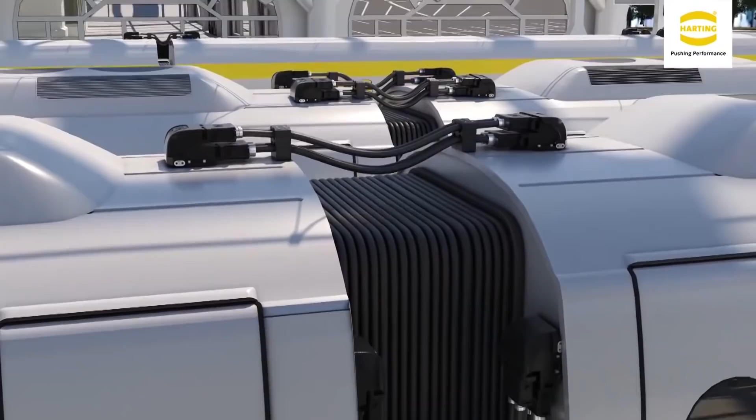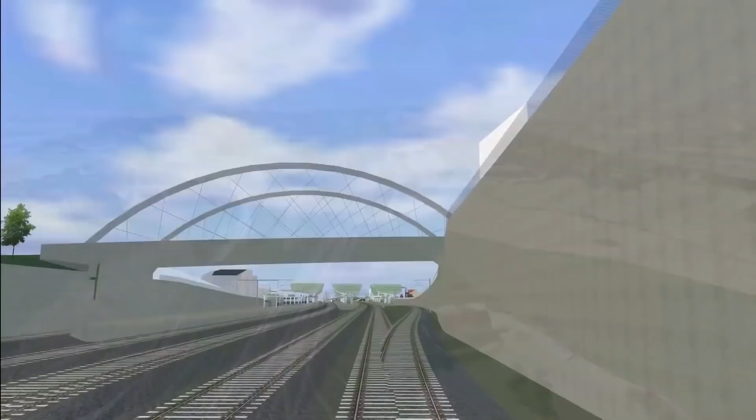Welcome back to Railways Explained. Today we are talking about one Norwegian mega railway project which is currently in the implementation phase, the Follo Line project. The Follo Line is at the moment the largest transport project in Norway and one of the most important high-speed railway projects in the world. The main reason supporting this claim is the great technical complexity linked to this project, and you will soon find out why.

The Follo Line project includes the construction of a 22 km long double-track high-speed rail line between Oslo Central Station and the new station in the town of Ski, for a speed of 250 km per hour. The line will have the possibility to accommodate both passenger and freight transport.

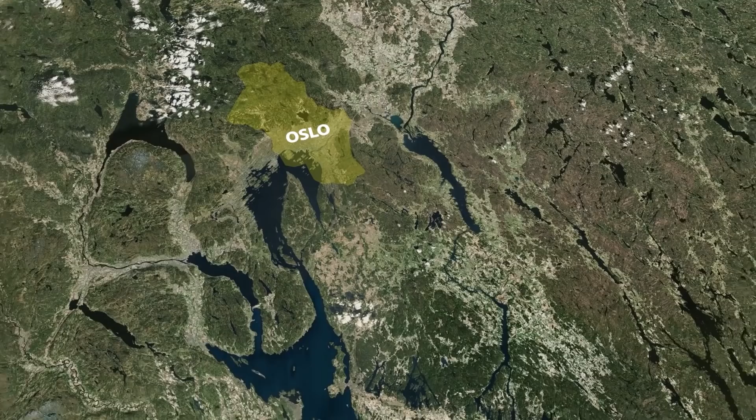It is a continuation of the Norwegian National Rail Administration's intercity plan to build 4-track lines along the three main corridors out of Oslo. The first was the Gardermoen line, completed in 1998, and the second was the Asker line, completed in 2011. Currently, between Oslo and Ski, there is a line known as the Østfold line, which was upgraded to double track and higher speeds between 1989 and 1996.

As the Østfold line has reached its capacity and population growth of at least 30% is anticipated in the region by 2025, the construction of a new connection with a new hub in the city of Ski is imposed as a logical solution. Now we come to the point.

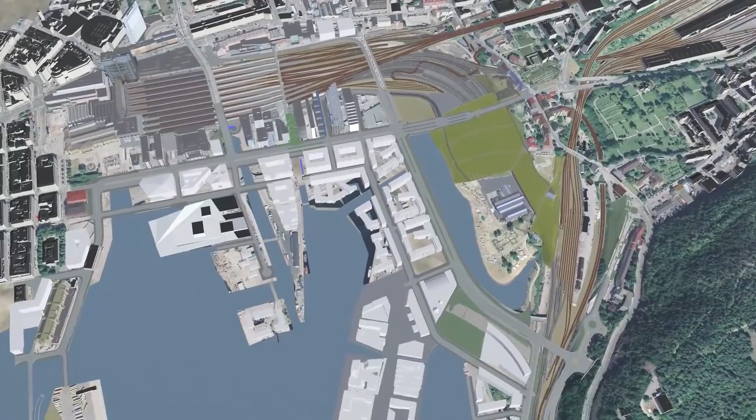Constructing new rail tracks in such a dense metropolitan area as it is the case here is a huge logistics challenge. Furthermore, one of the constraints of the project was to cause the least amount of disruption possible and to end much of the work without interfering with the daily traffic flows.

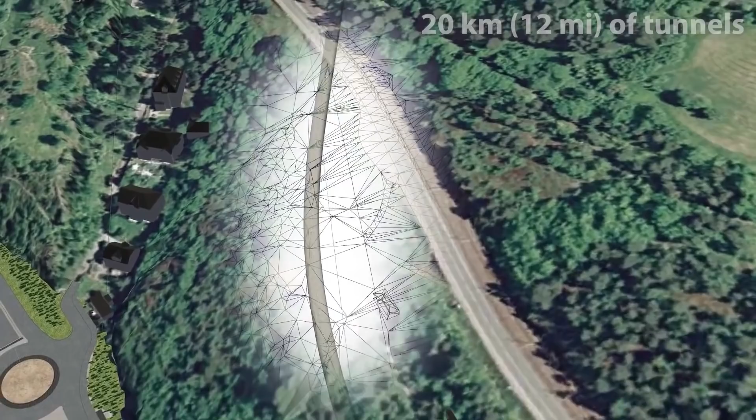You also might be wondering what kind of mega project it is that includes the construction of only 22 kilometers of rail tracks. Well, these 22 kilometers cost as much as $2.35 billion. The reason? Well, they include the construction of 20 kilometers of tunnels. But not ordinary tunnels. These tunnels will pass under the existing busy road tunnels. We got you, right? Okay, we'll come back to that later.

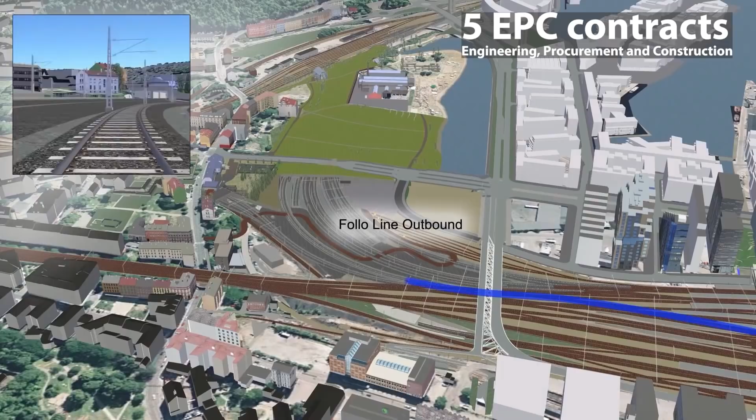The Follo Line project is divided into three sub-projects: Oslo Central Station, tunnel construction, and the surface section and new Ski station. The contract strategy for the Follo Line project has been formulated based on its size. The project has 5 EPC contracts for general contractors and 1 single contract as a frame agreement. It is split into the following main contracts: Civil Oslo S, approach and connection to Oslo Central Station; EPC Railway Systems Oslo S, connection of railway systems to Oslo Central Station; EPC Tunnel TBM, the Tunnel TBM section; EPC Ski, surface section and the new Ski station; and frame agreement for the signaling system.

Now, let's dwell in more detail on the construction of tunnels.

The tunnel concept consists of the construction of a twin-tube tunnel named the Blix Tunnel, which will be the longest railway tunnel in the country. As we said, the total length of the tunnels is 20 kilometers, but it is divided according to construction methods. 18.5 kilometers of the tunnel has been excavated in rock using tunnel boring machines, and by drill and blast and drill and split methods in the remaining parts towards Oslo Central Station.

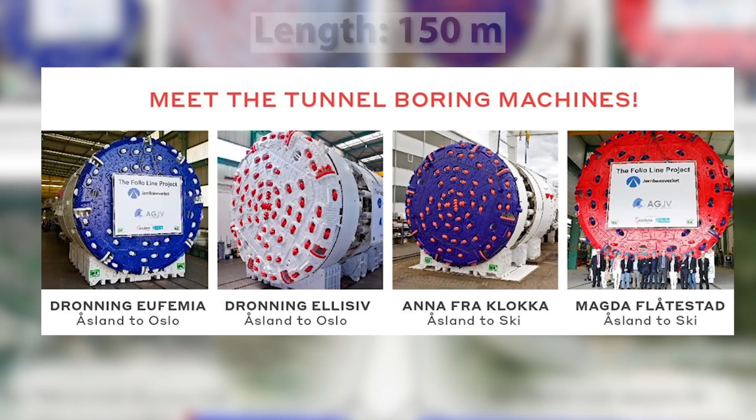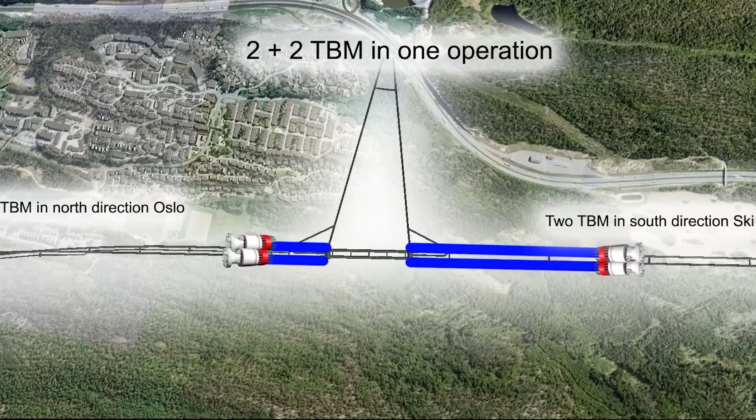The project is characterized by the fact that the double tunnel was created simultaneously with 4 TBMs, each one 150 meters long and weighing 2,400 tons. Also, an innovative solution was used for the access of TBMs. The project comprised the construction of a single-access site in the rural area of Åsland, about midway between Oslo and Ski. From there, 4 TBMs were launched, 2 in each direction, which excavated at the same time and at a close distance for long stretches.

The underground assembly tunnels, 20 meters high, 50 meters wide, and over 60 meters long, are the biggest ever made in Norway. It is definitely a record-breaking building site.

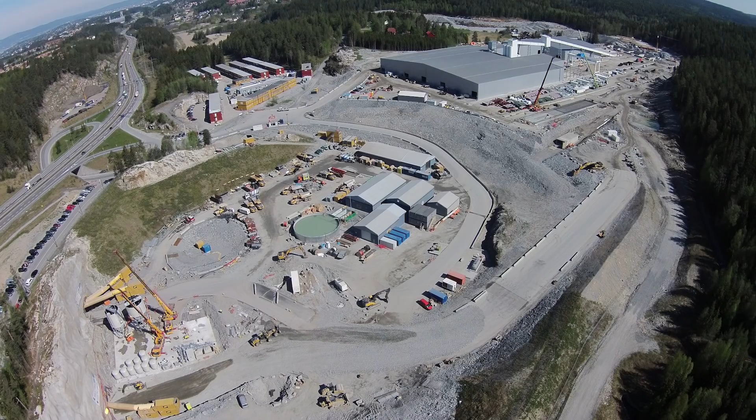In Åsland, a low-impact base camp was built, with over 500 homes for the workers, but also offices, a gym and a canteen. A factory to manufacture the segments needed for the tunnels was also built, so they can be transported while avoiding heavy traffic. The tunnel was lined with over 20,000 rings, comprising 135,000 segments.

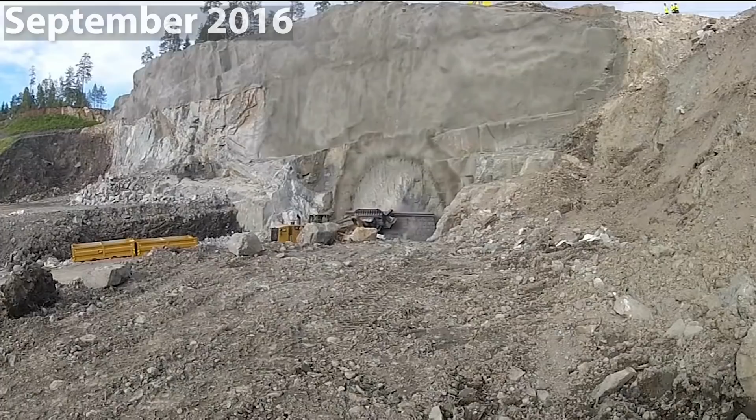The starting shot for the first machine was given in early September 2016, in the presence of the Norwegian Prime Minister Erna Solberg and the Minister of Transport Ketil Solvik-Olsen.

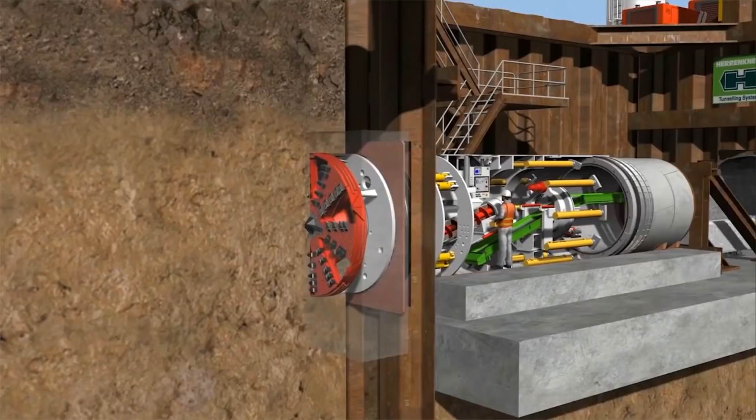On 11 September 2018, two of the four moles, Queen Eufemia and Queen Ellisiv, made the tunnel breakthrough simultaneously, ahead of schedule, while the other two TBMs, Magda and Anna, made a spectacular double breakthrough as well, in Ski on 26 February 2019. The tunnel boring machines drilled a hole of 9.96 meters in diameter, excavating about 9 million tons of rock, lining the tunnel with concrete segments, producing a smooth and watertight solution.

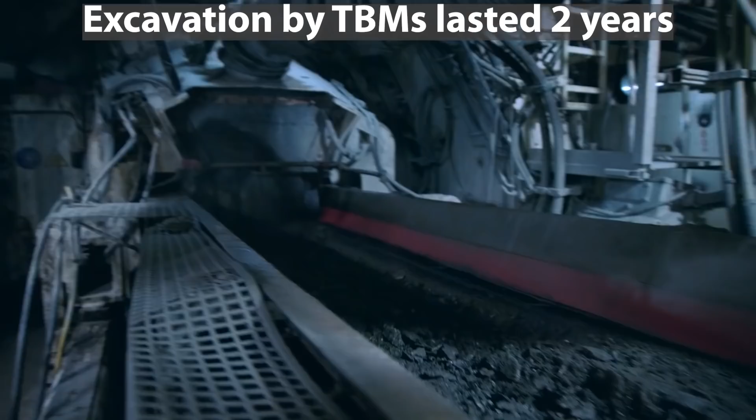Overall, the excavation of the 4 TBMs lasted about 2 years, involving over 750 workers and 100 engineers and technical staff from 25 different countries.

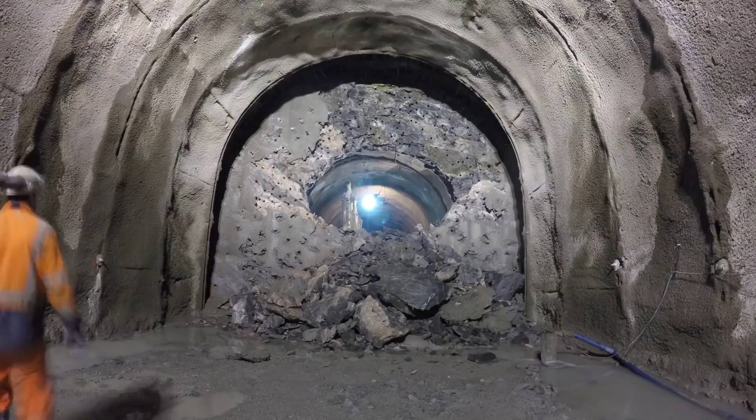The remaining 1.5 kilometers of tunnels represents the connection with Oslo Central Station. For this part, it was necessary to use the second method because the railway tunnels pass beneath the existing Ekeberg Road tunnels, one of Norway's busiest road tunnels. In addition, space is limited by various forms of infrastructure, including multiple oil caverns.

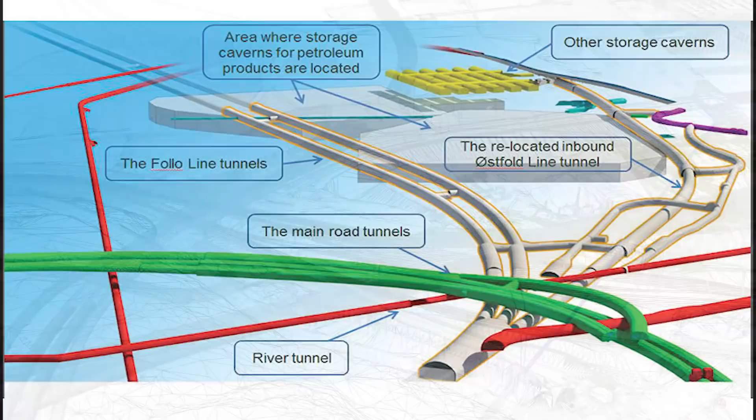Another important factor for the future urban environment is that the Alna River, which is the longest river in Oslo, will be able to pass above the railway tracks.

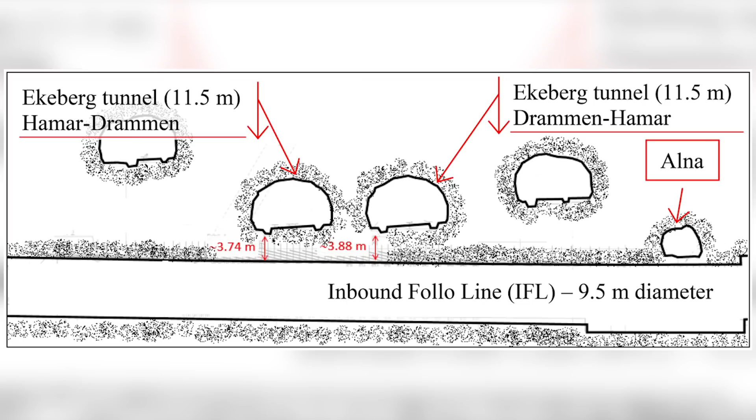The horizontal pillar between Ekeberg tunnels and Follo Line tunnels is less than 4 meters thickness. The thin pillar and the requirement to keep traffic safety in the Ekeberg tunnels at a high level at all times made the construction of the Follo Line very challenging and demanding.

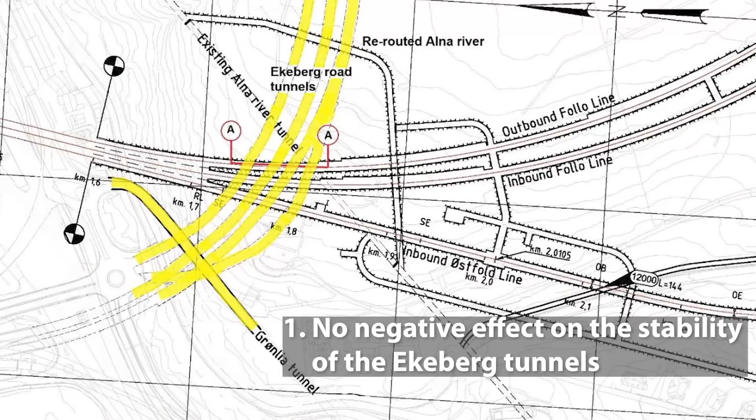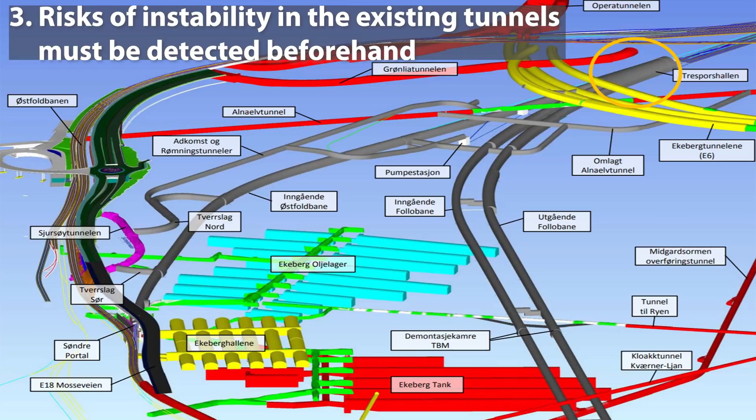We could break down the conditions for the construction of the Follo Line into 3 main requests. First, there should be no negative effect on the stability of the Ekeberg Road tunnels. Second, the traffic flow in the Ekeberg tunnels had to be maintained at all times. And third, any risk of instability in the existing tunnels must be detected beforehand so that all necessary precautionary actions could be taken on time.

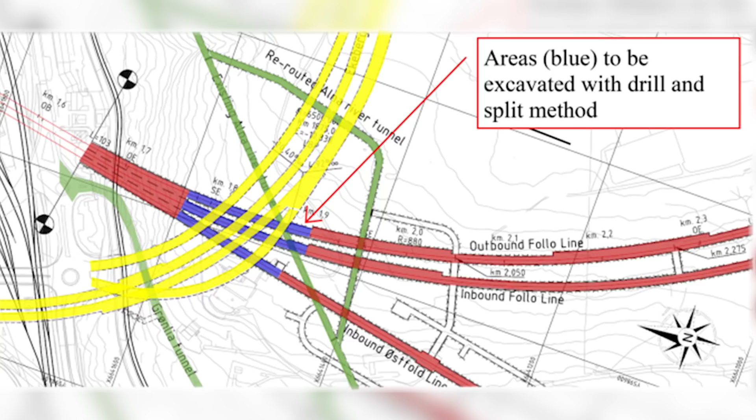The exit from Oslo includes an additional tunnel that connects the station with the existing Østfold line. While drill and blast is used outside the critical area, the excavation method specified for the area under the Ekeberg tunnels was drill and split.

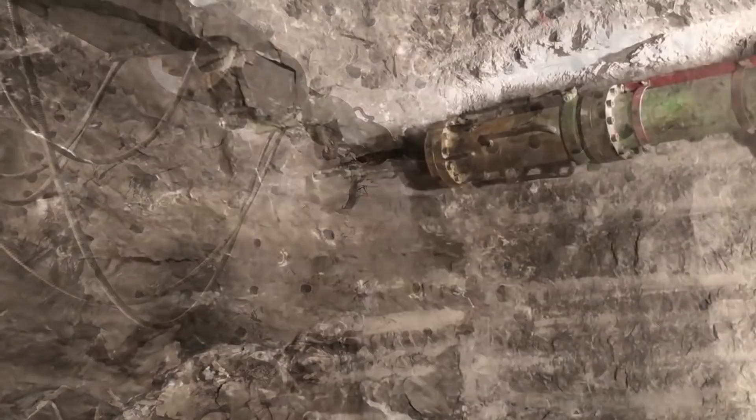Briefly, this method involves drilling holes in the rock mass, then using mechanical force to split the rock, and finally using a mechanical hammer to loosen the remaining rock from the rock face. The method is highly applicable in places with strict vibration limits and in situations where blasting is forbidden due to short distance to other infrastructure or other construction works.

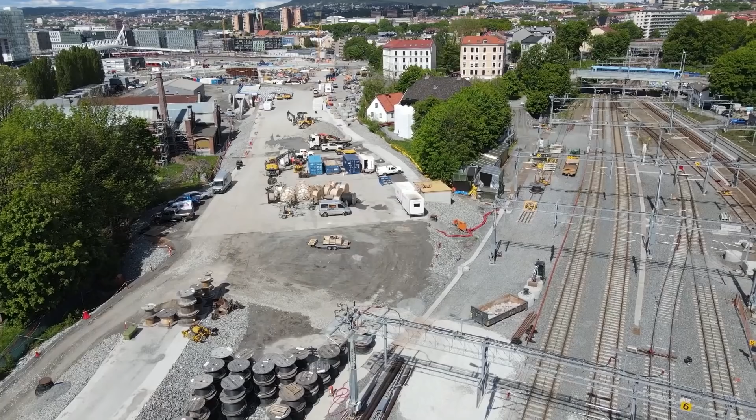The main construction phase commenced in 2015 and is scheduled for completion by the end of 2022. Once out of the tunnel, the trains on the Follo line will travel over a stretch of approximately 1.5 kilometers before arriving at the public transport hub in Ski.

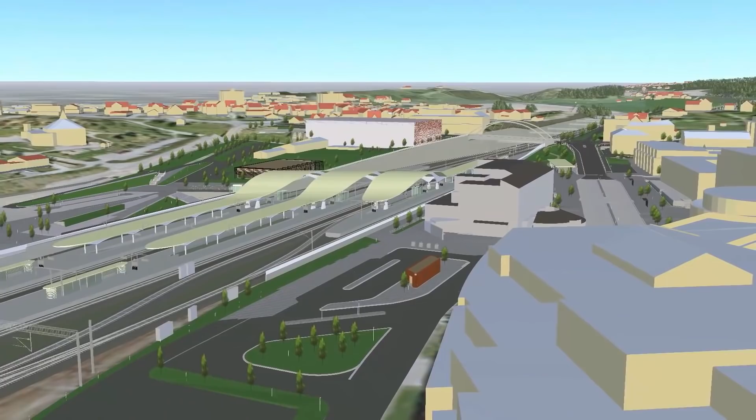Trains will pass underneath the new Norby Bridge, which was reconstructed to make space for new tracks. The new Ski station is being built with 6 tracks and 3 central platforms, plus a new underpass, a road bridge, a bus terminal, and an extended car park, all with the aim to enable accessibility, efficiency, and integration in the urban environments around Oslo.

The vitality of a particular urban area, along with its plans for growth, development, and economic attraction, can be measured in part by its mobility systems. When designed to be sustainable, mobility becomes evidence of a city's capacity for innovation, as well as a formidable tool for enhancing economic strength. The Follo Line project is a clear example.

The new line was designed to decongest the traffic in the southeastern outskirts of Oslo, but also to integrate the public mobility of the small towns around the capital.

When it finally starts operating, commuters will be able to halve their average traveling time from about 22 to about 11 minutes. The number of trains crossing Oslo daily along the route will increase from current 12 to about 40.

Local and freight trains will continue to run along the Østfold line, while regional and fast trains will move along the Follo line.

Along the same corridor, the new line will facilitate 11,000 more trips per day, with an average increase in frequency of 43% and up to 67% at peak periods.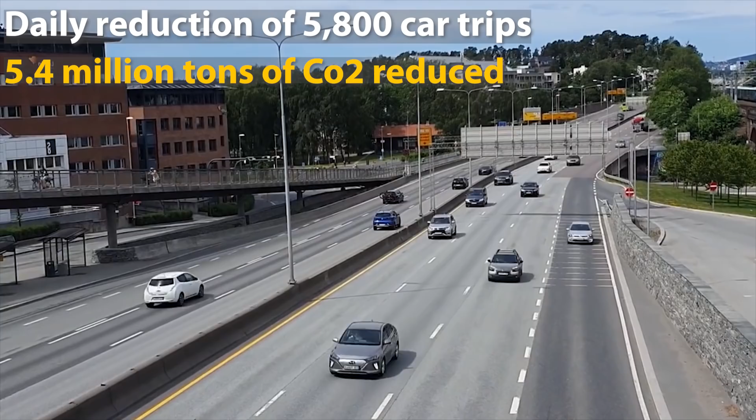Notably, the new line will amount to a daily reduction of 5,800 car trips, contributing to a reduction of 5.4 million tons of CO2. As the Østfold Line connects Norway to continental Europe, with 80% of all land-based international freight transport going through it, the Follo Line will contribute to a significant capacity increase on international freight traffic.

The rail administration has set a goal of tripling the amount of rail freight by 2040, which for the South Corridor is equal to the removal of 750 trucks per day from European route E18. The Follo Line will also allow freight trains to pass during rush hour, which is not the case today.

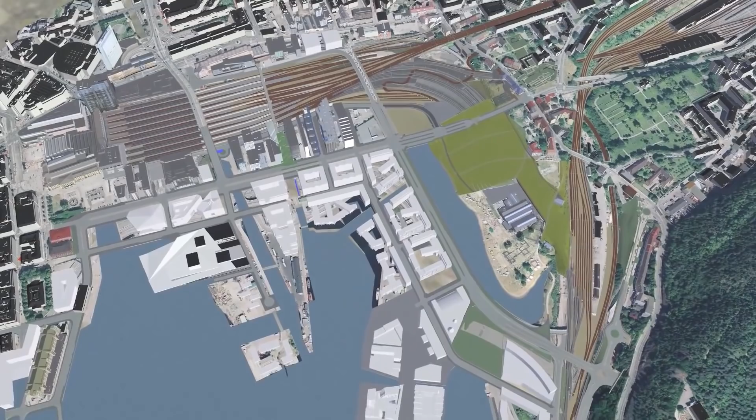In any case, this was the story about the Follo Line project on Railways Explained.